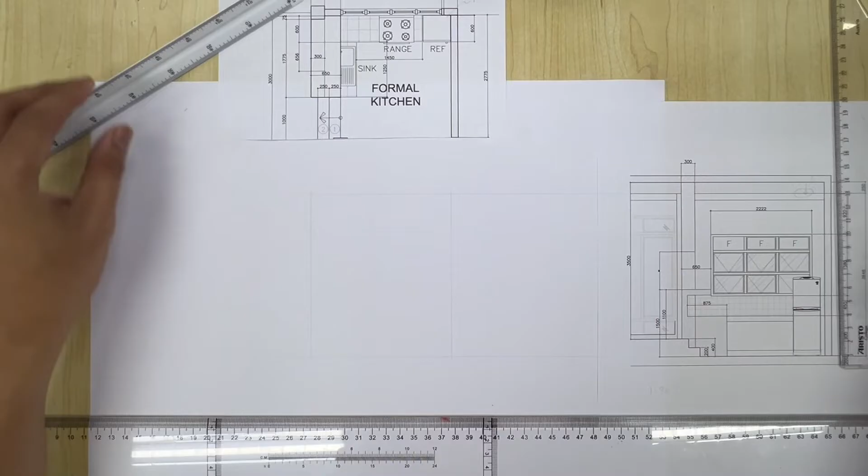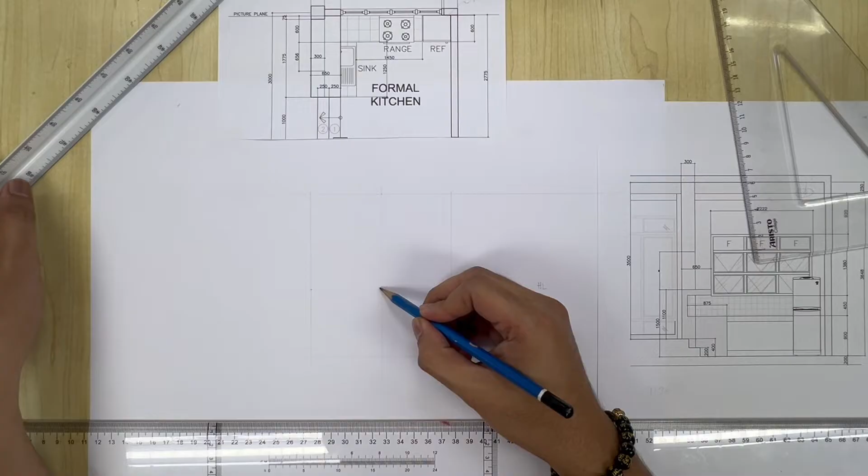So ngayon, we will just put label. This is our horizon line. This is our ground line. Tapos, ito yung magiging vanishing point natin. Yung vanishing point natin is yung intersection ng center tsaka nung horizon line natin.

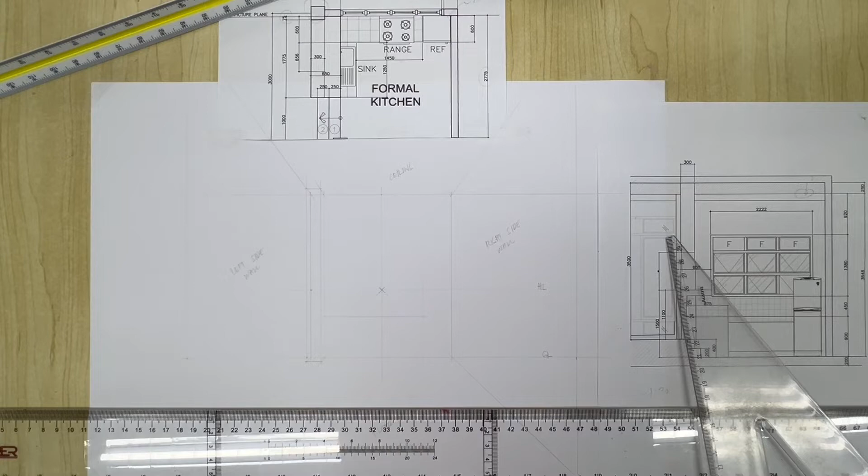Okay? So, ang gagawin natin ngayon is, we are going to take the measurement of the depth of the counter. For this case, the depth is 600 mm.

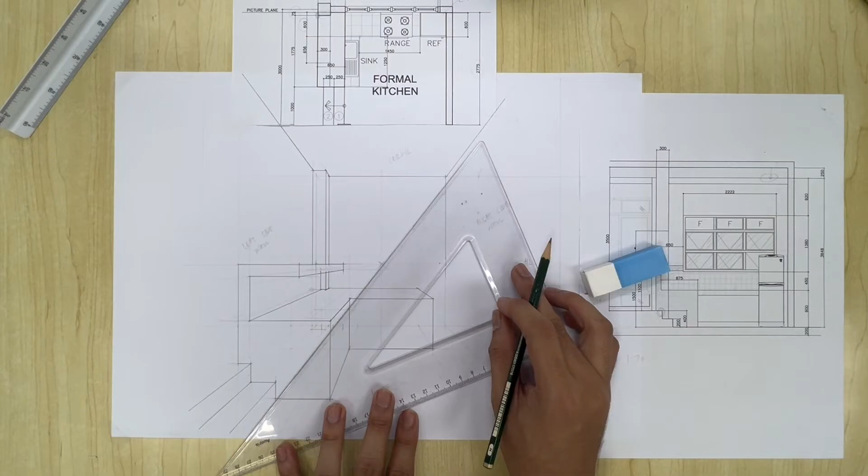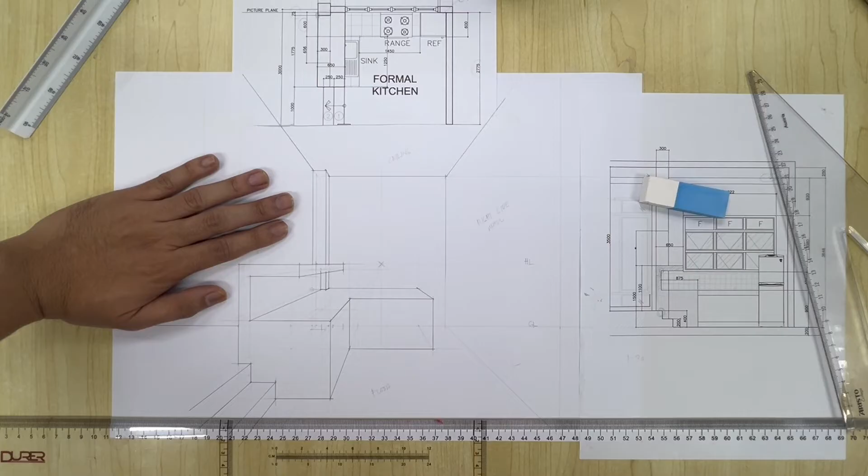Yan, so ngayon na-determine na kompleto na natin halos. So kung kumpletuhin natin ito, may area ka pa talaga dito ng floor, wherein this is part already of the dining area. Kung titignan din sa plan, there is actually a sliding door dito sa part na ito, pero we will not include it anymore. So later on, let's try completing first.

Let's outline first yung windows natin, wherein ganito ang hitsura na dapat. Para madali lang, we are just going to project our windows from here, dala lang pababa, tapos project lang, madali lang siyang gawin kasi projection lang halos lahat ang gagawin mo.

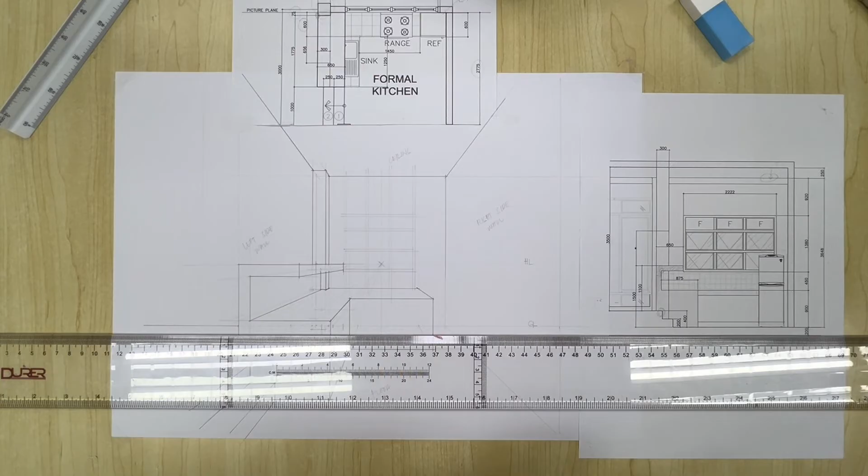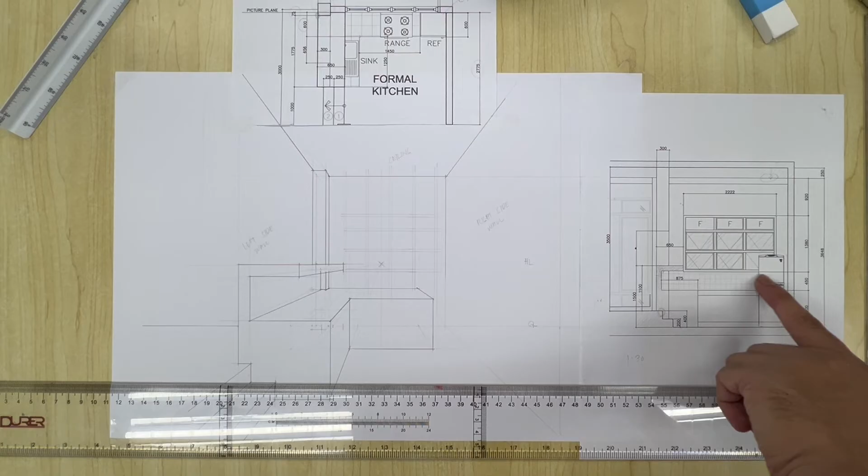So ang sunod nating i-establish muna is we establish this ref. Kasi based dito, before we could complete this one, partly yung dito, yung lower right ng side ng window mo ay covered by the fridge or the ref. So dapat ma-establish muna natin yung ref. So paano natin gagawin 'yon?

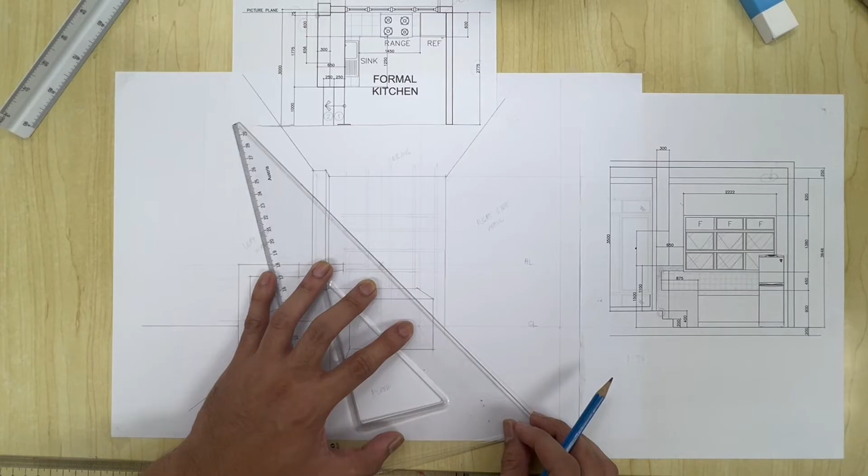Pa-project lang ulit natin siya pababa, wag lang natin siya ididikit masyado dun sa wall. And then we establish again the depth. So ngayon, based dito, pwede natin, we just assume natin ng konti. Tapos, based dito sa drawing, halos pantay lang yung ref natin, tsaka yung ating counter.

So mula dito, sukat lang tayo ng 60 for the depth of our ref. Kung saan nag-intersect, yun yung kabuuan ng ating base ng ref or plan ng ref.

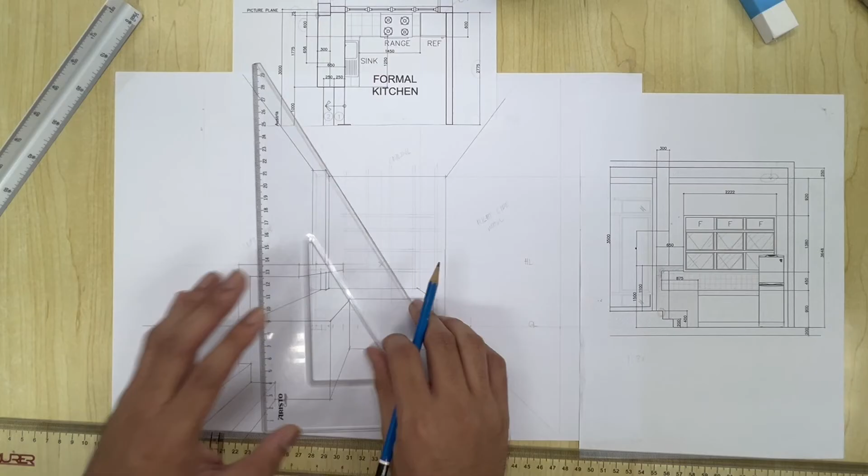Ngayon, pwede na natin i-project vertically yung lines natin. Hindi ko na siya papaabutin sa taas kasi dito lang naman banda yung height ng ref. Ngayon, kung ma-observe nyo, medyo kinulang, maliit yung ano. So ang actual height dapat ng ref natin is hanggang dito, based on the proportion. So dito ko na lang siya i-adjust sa plan natin.

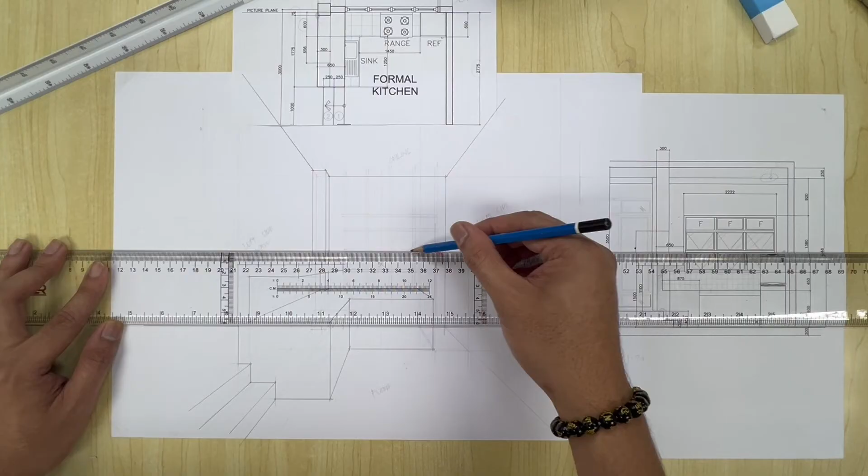So from here, project ko lang ulit. Dito, mula dito, ito yung lines natin. Yung intersections nito, yun yung ipoproject ko para ma-determine yung height ng ref natin o ng fridge. So for this case, ganito yung height niya.

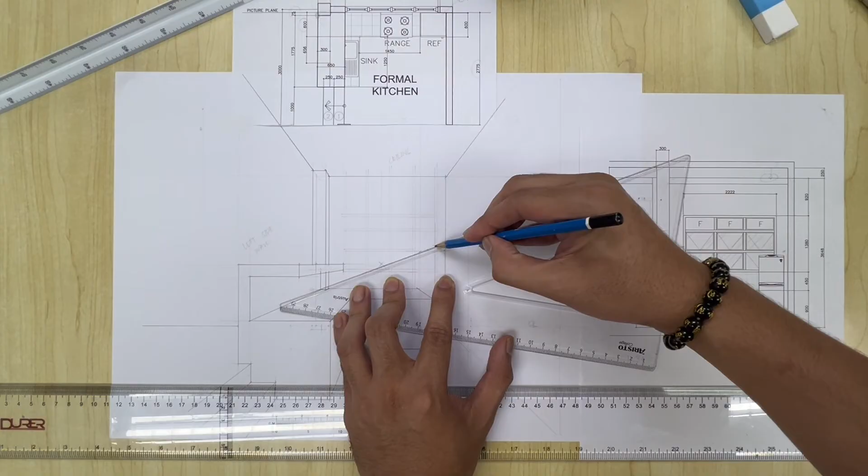So yan, so another din na important ay yung height ng ref. Kailangan ma-establish natin siya, so po-project ko lang siya ulit dun sa likod, dun sa measuring line natin, and then para makuha natin siya. Pwede natin assume na lang natin ng konti yung kapal nung door ng ref.

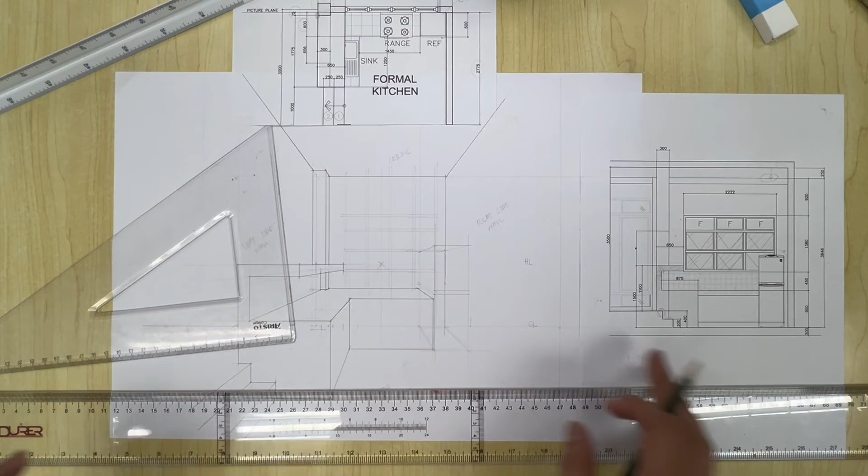Okay, yan. So ngayon, we will outline the ref para lumutang siya, ma-identify na din natin. So we can also finalize yung the rest of our lines, kasi dito, we are almost done here eh, so dito na lang yung kailangan nating ayusin.

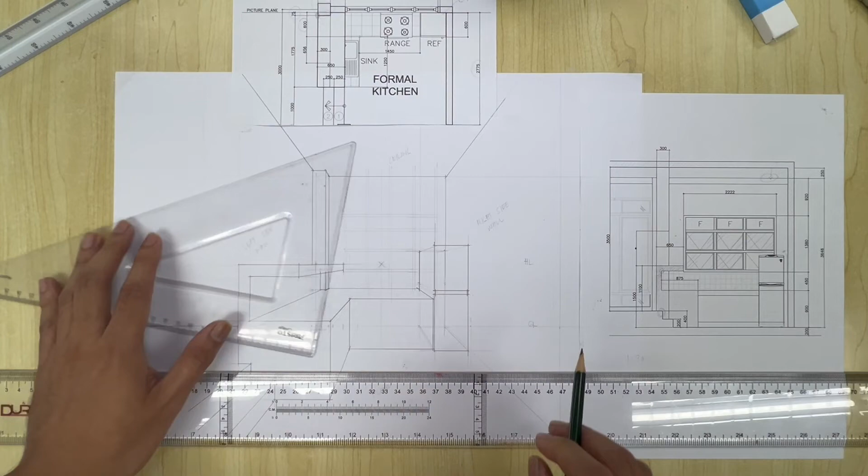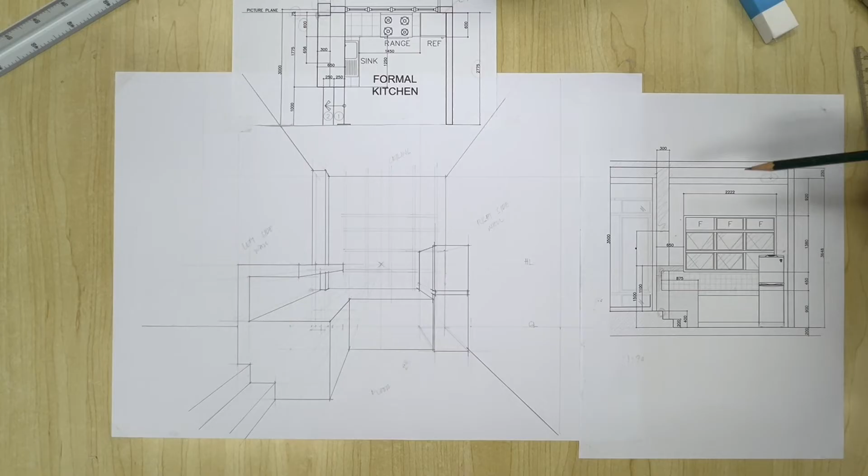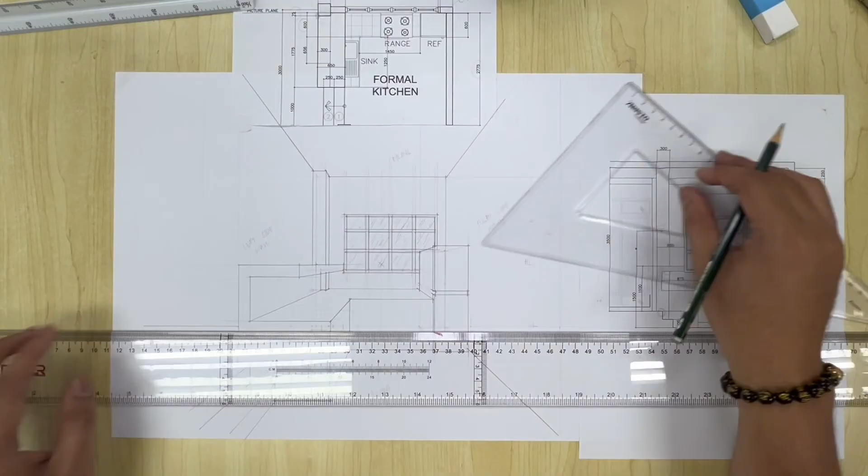Yan, medyo glass looking na siya. So ngayon, we are going to establish also yung sink natin, then our range. Medyo challenging to, pero before we proceed with that one, we will first establish this one, itong drop wall, so kasing kapal lang siya ng column natin, kung makikita nyo.

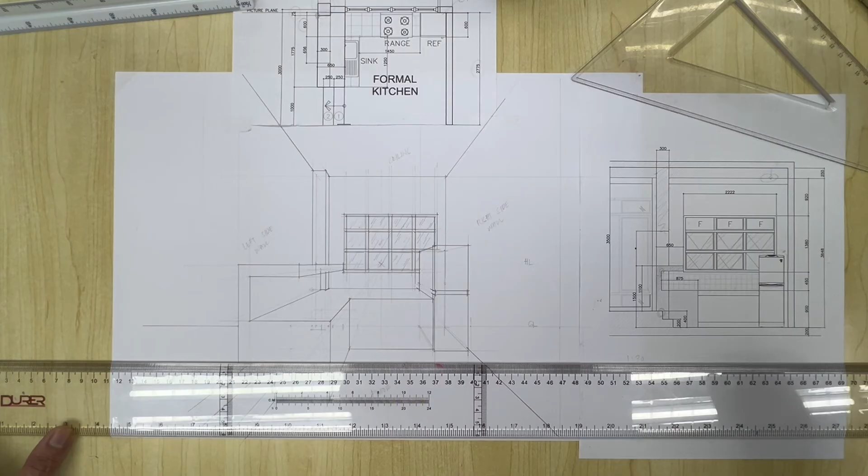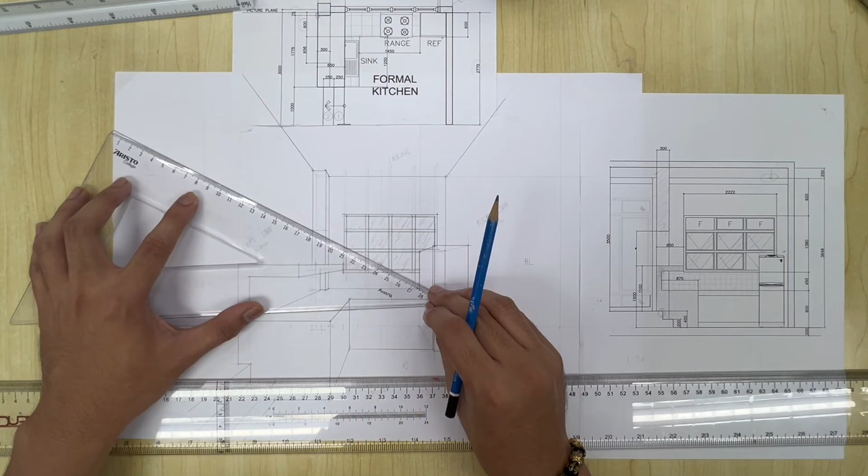Dito, ang gagawin lang natin, we are going to project this one to this point, and from there we are going to project it. Dito, base dito, kapantay lang siya ng counter natin. So from there, we are going to project palabas dun sa intersection points.

Yan, madali lang natin siyang i-establish. So, most likely we don't need this anymore. Actually, that's a hanging cabinet kasi there, so we can actually put details din naman kung gusto mo. So, pwede natin lagyan.

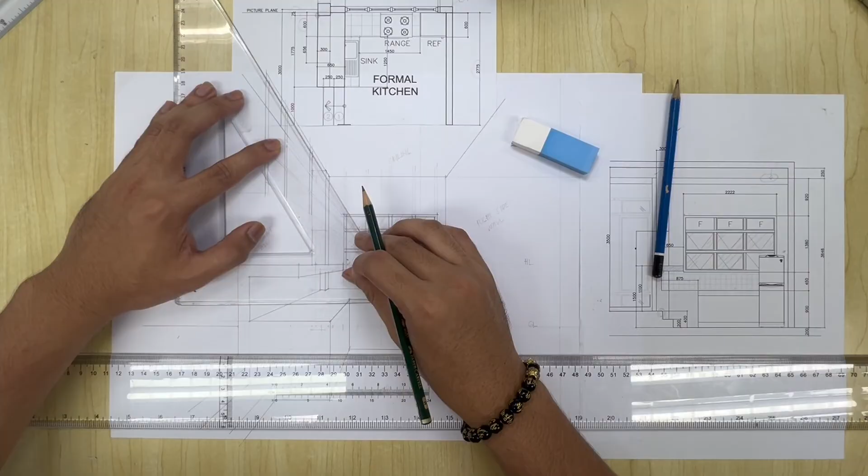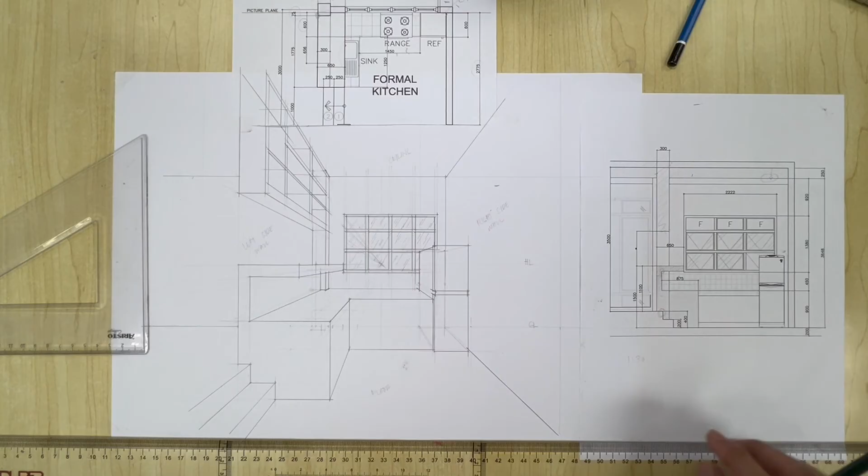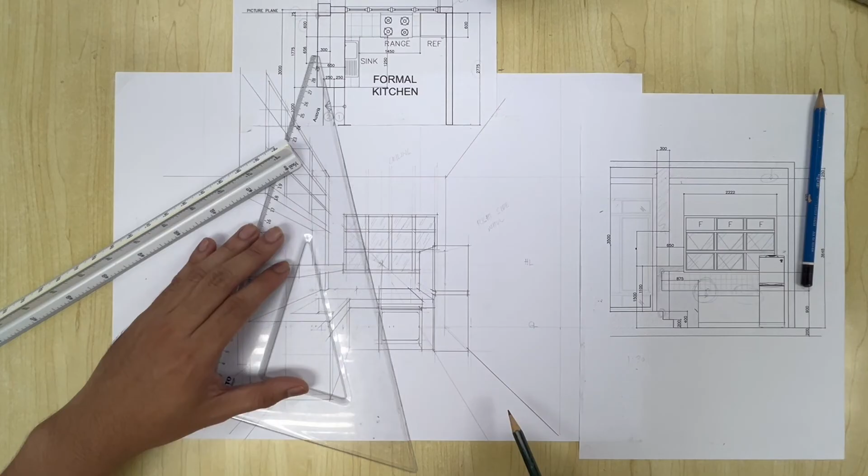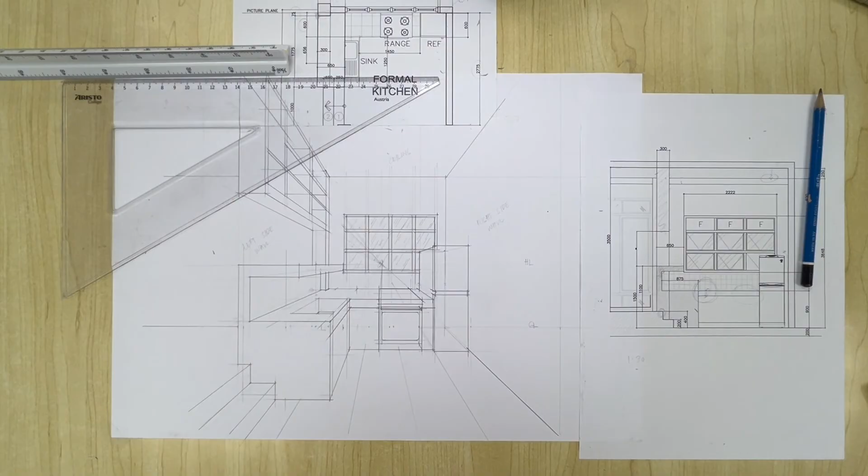So now we are going to locate this one here and this one. Ngayon, we will just complete this drawing with our floor tiles. So yung kung na-observe nyo, lahat ng projection ko ay papunta talaga dun sa measuring line ko, which is yung aking lower edge ng floor, tapos yung mismong saan nakalocate yung finish floor line.

Yan, so tapos na tayo. We are done with our interior perspective ng ating kitchen. So I will pen this down, tapos ita-timelapse ko na lang siya. I hope naintindihan nyo siya, and later on I'll show you the finished product of this output. So good luck sa gagawin yung plate and enjoy. Thank you.